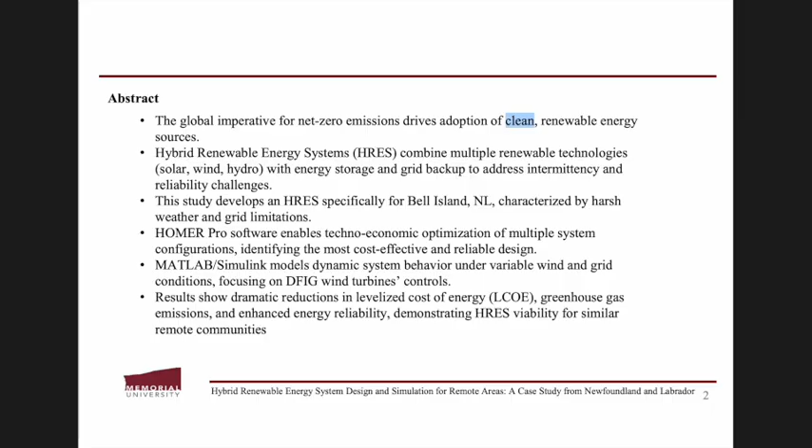In this study, I focused on Bell Island, which has strong wind but a weak connection to the main power grid. I used Homer Pro to find the best mix of wind, solar, batteries, and the grid to keep power cheap and reliable. I also used MATLAB Simulink to study how the system reacts to changes like wind speed. The results show that this type of system can really help reduce costs, cut carbon emissions, and improve energy reliability.

Energy is essential for everyone's life and for growing the economy, but it also causes most of the greenhouse gases that lead to climate change, about 78% globally, and even more in Canada, because of our cold climate and long distances between towns. Many small Canadian communities like Bell Island still use diesel generators, which are very expensive and bad for the environment.

Solar and wind energy are cleaner, but they don't always work when we need them, like when the sun isn't shining or when the wind isn't blowing. That's why we need hybrid systems that combine different energy sources with batteries and smart controls. Most older studies only looked at parts of the problem, but this project takes a complete view, looking at both the costs and how the system behaves in real conditions.

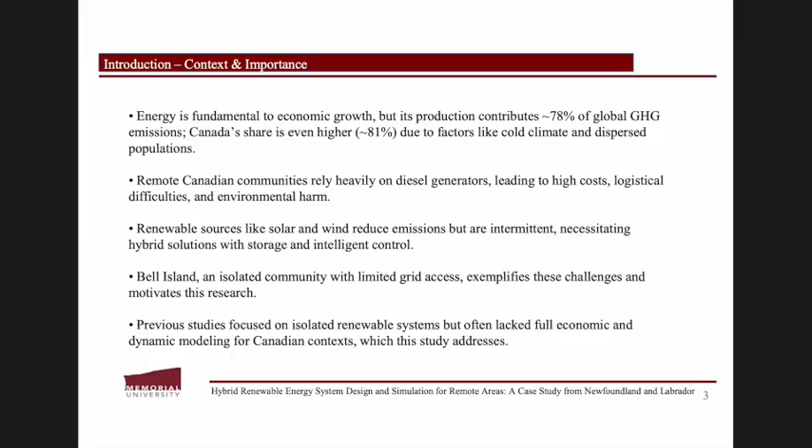This project has five main goals. The first goal is designing a hybrid system that works well in Bell Island's weather and energy conditions. The next goal is using Homer Pro to test different combinations of wind, solar, batteries, and the power grid and choose the most cost effective one. The third one is using Canadian made equipment as much as possible. This supports local jobs and makes future maintenance easier.

The fourth one is using MATLAB Simulink to test how the system performs when wind speed or grid voltage changes quickly. Measuring both economic results, like cost per kilowatt hour and how long until we earn the money back, and environmental results, such as how much CO2 we can cut over 25 years, will be our fifth goal.

To build a reliable model, we first needed good data. We used electricity usage data from Statistics Canada and local utilities to understand how much power people use during different times of the day and year. For wind and solar, we used weather data from Environment Canada over the last 10 years.

The wind turbines we chose, EO20 and EOX M21, are proven to work well in Canada. For solar, we selected Canadian Solar panels. Battery sizes were based on how much backup power was needed during times with low wind or sun. For the financial part, we used realistic numbers for inflation, interest, and fuel prices, and we planned the system for 25 years, including parts replacement.

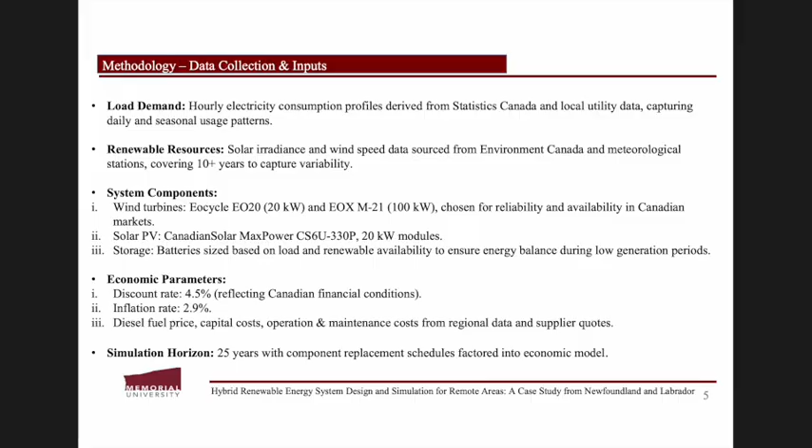The island has around 2,079 people, most of them living in Wabana. Most homes are single detached houses and they use more energy than apartments or smaller homes. Based on average use in cold climates, we estimated that the island needs about 13.4 million kilowatt hours of electricity per year.

The highest power demand, called peak load, is about 4,552 kilowatts in winter when heating is needed most. Knowing these numbers helped us figure out how big the system needed to be to meet the demand.

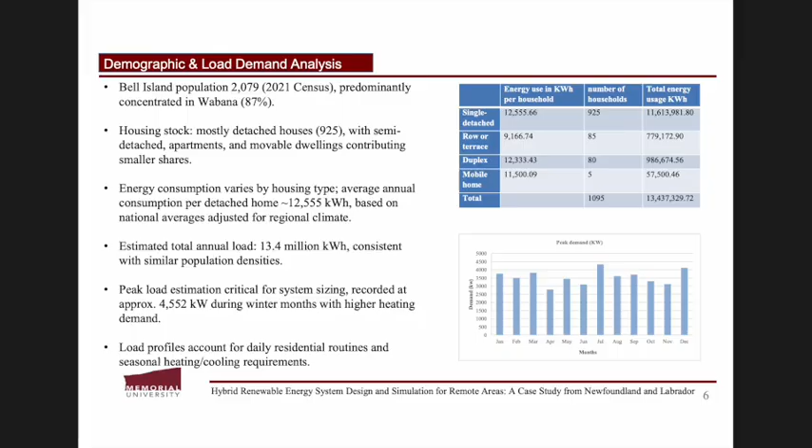Wind on the island is pretty strong, averaging 6 to 8 meters per second, and it's even stronger in winter. That makes wind a good energy source. Solar power is better in summer when there is more daylight. This means that the system needs to balance both sources across seasons. We use this information to decide how much battery storage we needed so that power is still available at night or during calm days.

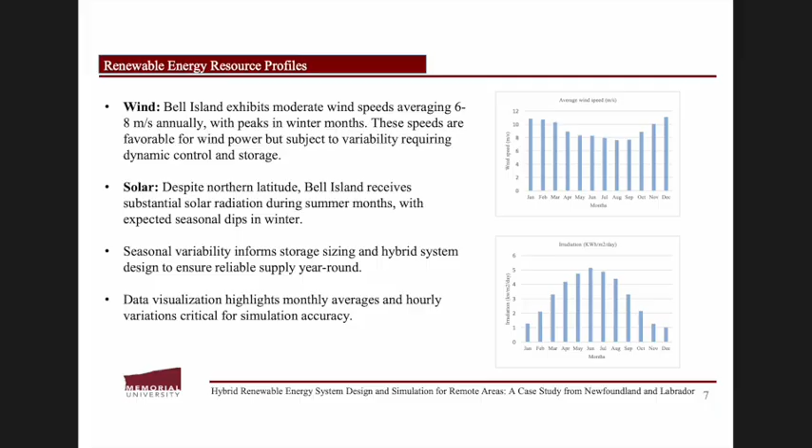The final system design includes 178 EO20 wind turbines and 28 EOX M21 turbines. Together, they generate around 23.6 million kilowatt hours a year. The system also connects to the grid, which acts as backup and allows us to sell extra power back. This is called net metering.

The battery system stores power during high production times and releases it when needed. We included redundancy and peak load matching so the system works even during tough conditions. A diagram shows how everything connects and works together.

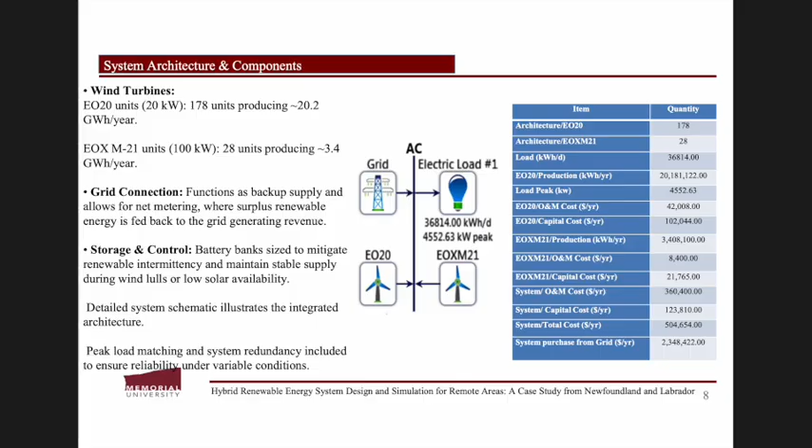The total startup cost is about $2.55 million, which includes the turbines, solar panels, batteries, and installations. But the annual operating costs are low, only about $360,000, which is much less than diesel systems. The cost per kilowatt hour is about 1.95 cents compared to 13.2 from the regular grid, a huge saving.

The base system would produce 322,000 kilograms of CO2 every year. Our new system actually removes 243,000 kilograms of CO2 per year because of clean energy and selling power back. The project pays for itself in under 2 years, and the return on investment is about 55.5%, which is excellent. The money made from selling extra power helps cover yearly costs.

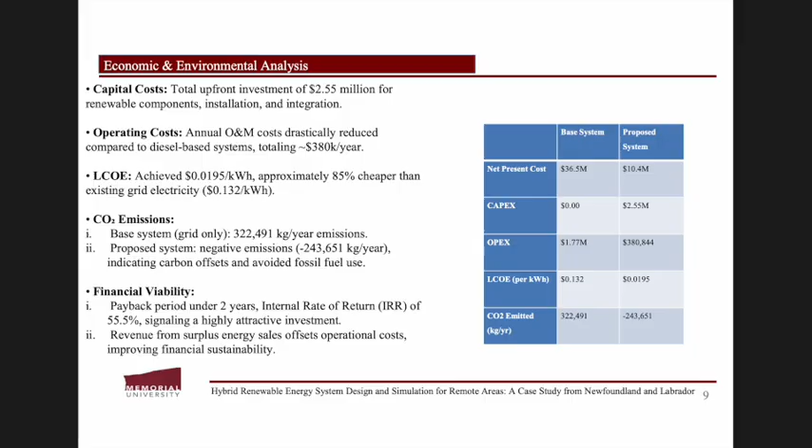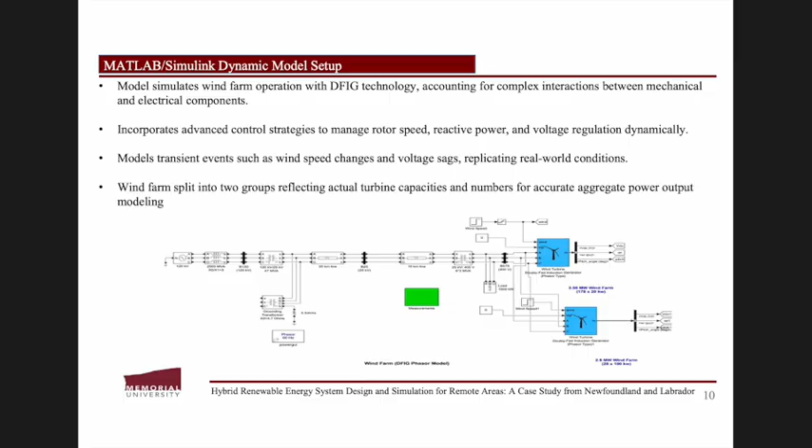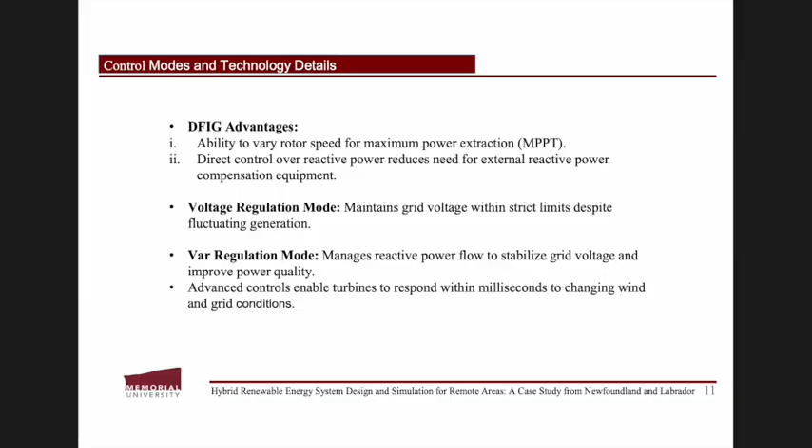DFIG turbines are very flexible. They let us change the rotor speed to get the most energy from the wind. This is called MPPT. They also control reactive power, which helps keep the grid stable. In voltage regulation mode, the turbine keeps voltage at safe levels. In VAR regulation mode, it adjusts reactive power flow to improve grid quality. These controls act very quickly, within milliseconds, so the system can handle sudden changes in wind or grid conditions.

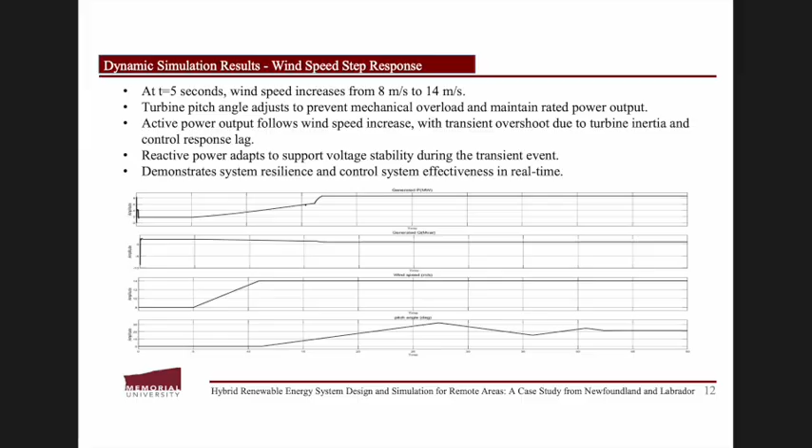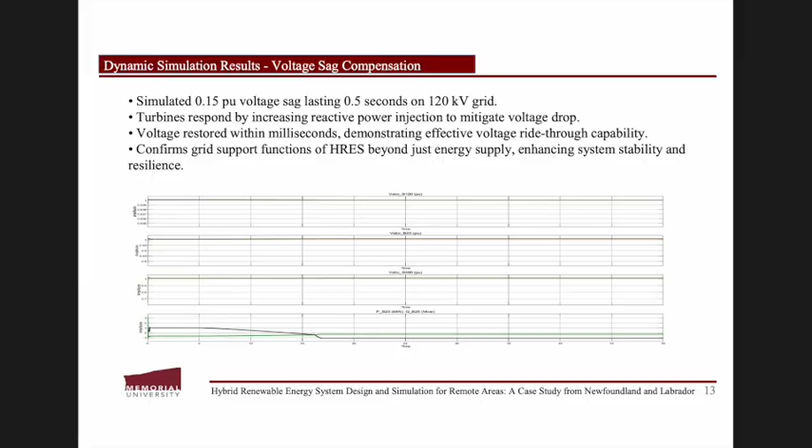As you can see here, we have the dynamic simulation voltage sag compensation. In another test, we simulated a short voltage drop or sag on the grid. It lasted just 0.5 seconds, but the turbines reacted immediately by injecting more reactive power. This quickly brought the voltage back to normal. This shows that the system can not only generate electricity but also helps support the grid and improve its stability.

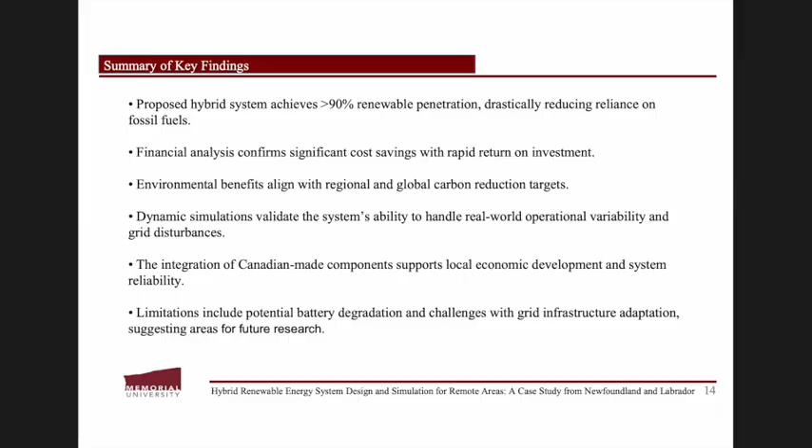To sum up, our system provides over 90% of the electricity from renewable sources. It saves money and pays back the investment quickly. It helps fight climate change by cutting or even reversing emissions. It works well under real world conditions as proven by the dynamic simulations. It also uses Canadian made parts which supports local jobs and improves reliability. Of course, we did see some challenges like battery wear over time and possible grid upgrade needs, which we suggest for future work.

In conclusion, this hybrid system is a great solution for remote places like Bell Island. It's clean, cost effective, and works well with the grid. The design we used can be copied in other similar locations in Canada or even worldwide. In the future, we plan to study better battery technologies, larger storage, and smarter controls that can predict changes. Keeping the system monitoring and making updates over time will make sure it works well for many years.